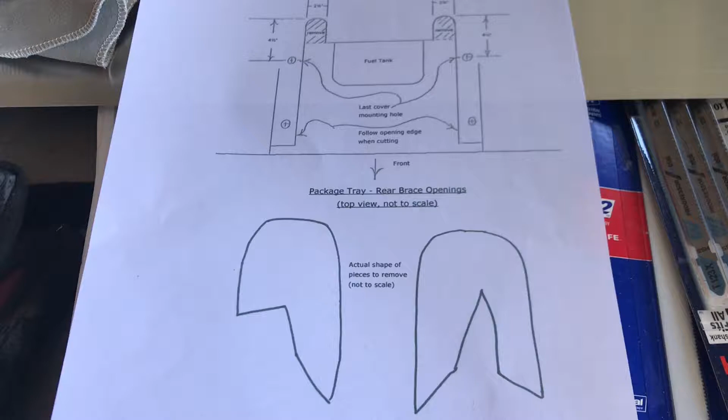All right, we're on to the next stage here. It's time to cut the package shelf in order to get this roll bar to fit in properly.

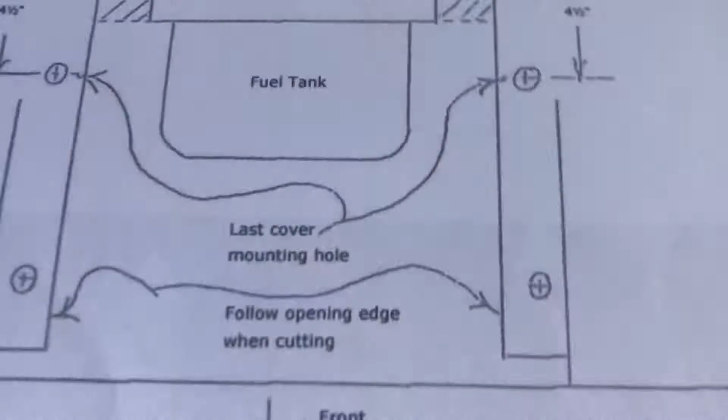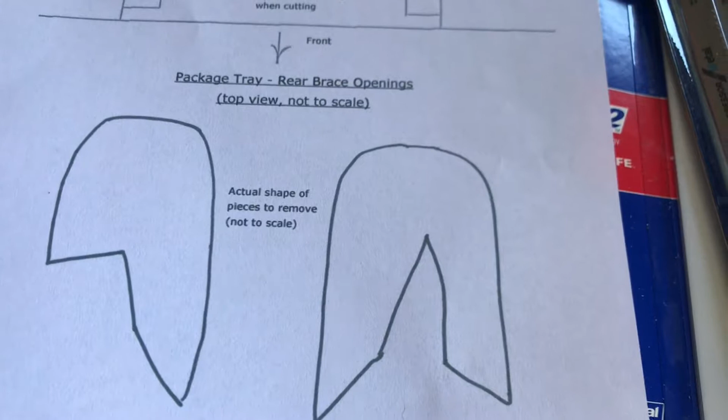They show you dimensions that you're supposed to cut at from the last mounting hole: 4.5 inches back, and then straight along that edge, 2¼ inches in on both sides. And then they give you these wonderful drawings: package tray, rear brace openings, top view not to scale, actual shape of pieces to remove, not to scale.

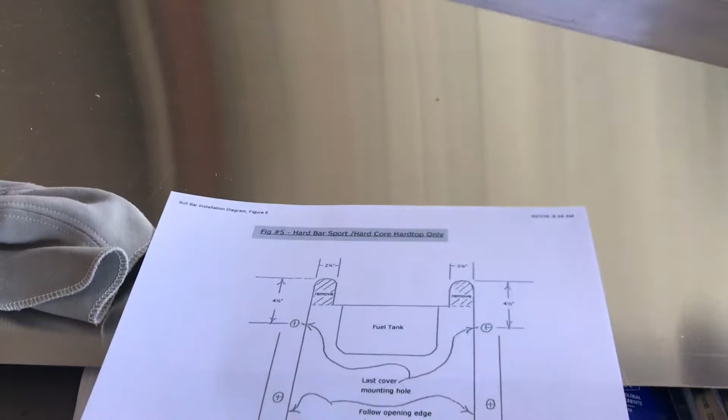One of the things I'm doing is using a battery powered jigsaw to make my two initial cuts. I'll take you into the car so you can see what I'm doing there. Then I made two 2¼ inch pieces of aluminum stock, and I'm going to use that to get the rest of the stuff done with a clean break, hopefully, as long as I am able to do what I plan on doing.

So let's go inside the car. We'll look at that, and I'll grab my two little pieces of aluminum here that I'm using.

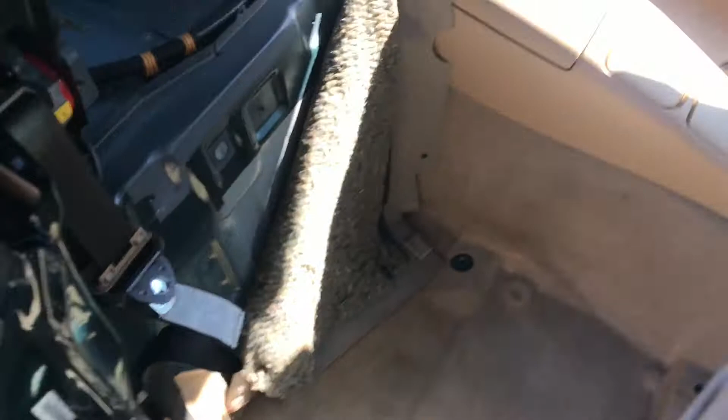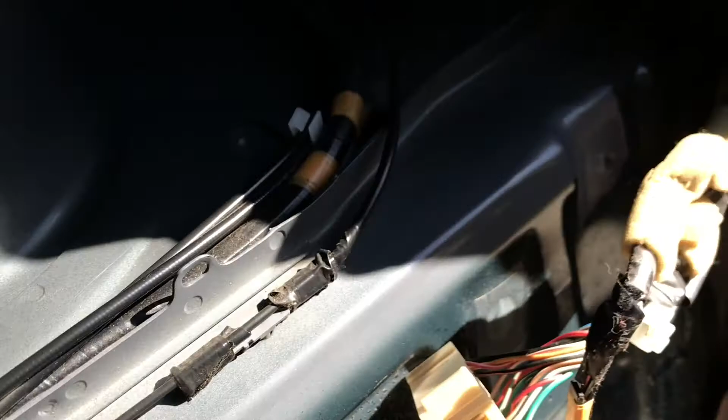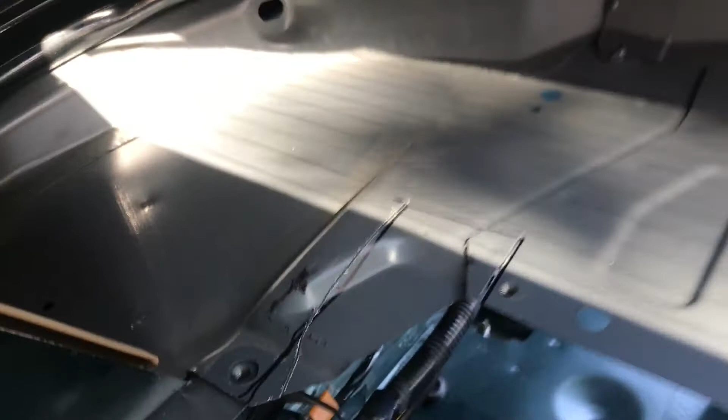Now, one of the other things I did was, as you can see, vacuum cleaner right there. Using that jigsaw, you're going to get little pieces of metal everywhere, and I mean they were everywhere. But I've already taken the vacuum in here and vacuumed up everything that I could find and see, so all of that is out of here. And also, don't forget, wear your safety goggles or glasses so you don't get crap in your eyes, which will be a pretty bad day, getting metal slivers in your eyes.

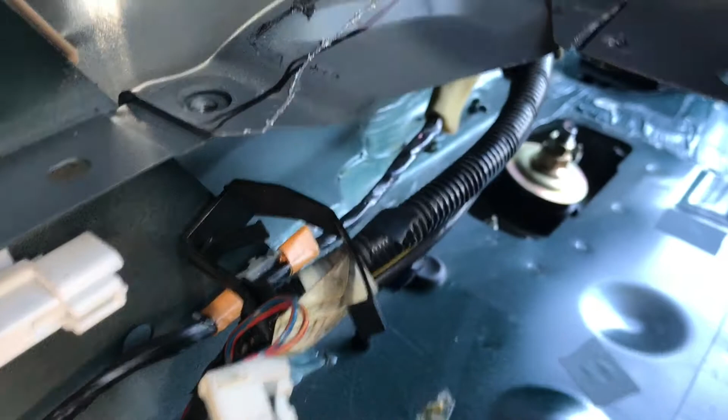So anyway, here's my first two initial cuts. Now, using that jigsaw, because of this tower right here, I wasn't able to get in right where my line started at. That shouldn't really play a factor too much, but I plan on cleaning it up, making it a nice straight line, and then coming down, as you can see, my line comes down to here.

Here's where the 4.5 inches was. Then I came across. Now, I'd rather be off shorter than longer, because I can always remove little bits and pieces after the fact. So I've got these two pieces here.

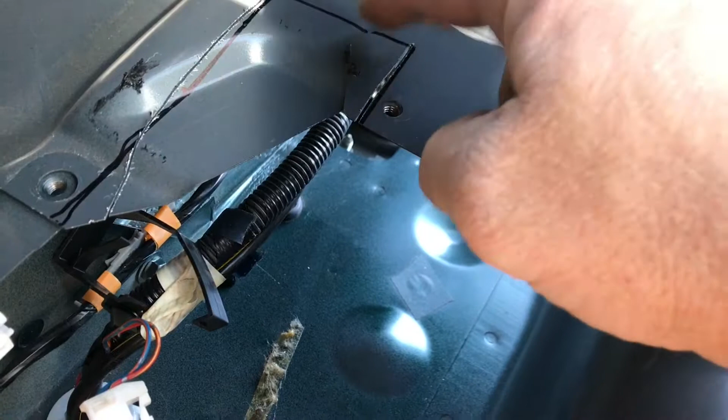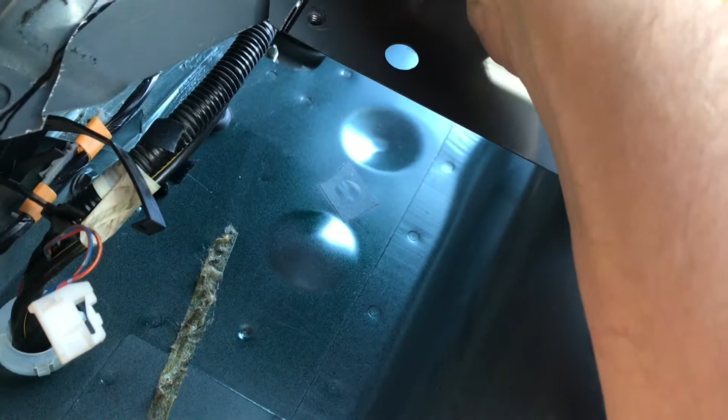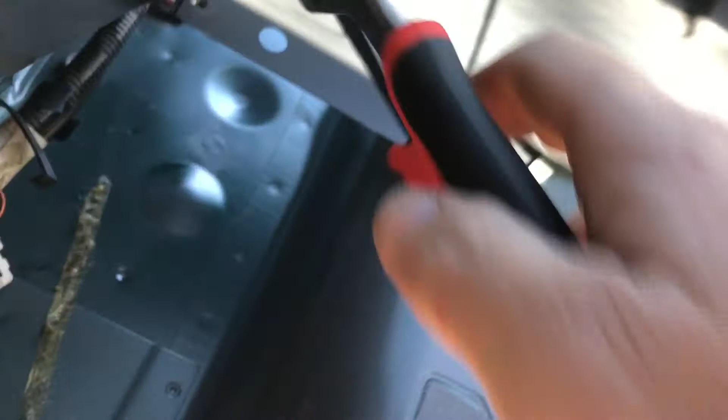What I'm planning on doing now is I'm going to take some tin snips. I'm going to cut along here first just to get rid of this piece, and then I'm going to take these pieces here, put them on both sides of my bend, use my channel locks to grip it all, and then start manipulating it back and forth until it snaps off. It should give me a nice clean line to work from there.

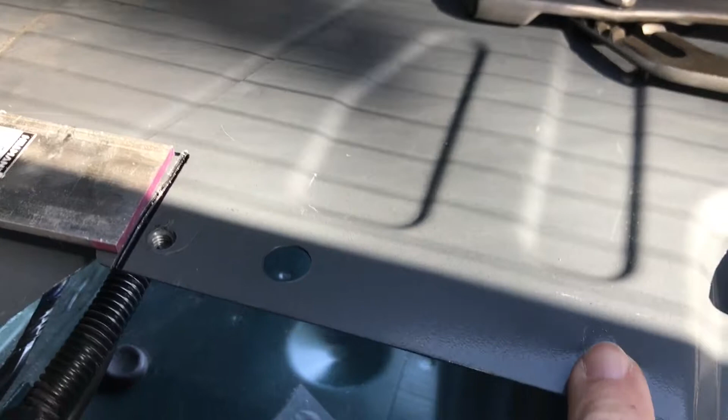Now, I did keep my two mounting holes here so far. If this is a problem, like I said, I'll just trim off as much as I need to get it done. I don't feel like taking off my top, just because I'm the only one doing this alone, and I don't have a second set of hands to help me get this top back on. The top is in really great condition, I don't want to mess with it, and it's also got the glass window, so if there's one less thing I have to do, then great. So anyway, I'm going to get to removing those. I've already made my two straight cuts on that side as well, and we'll keep going from there.

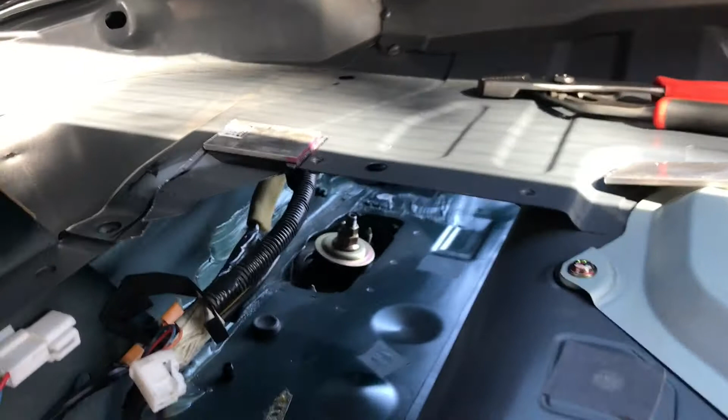All right, so round 2 of cleaning up all the metal flakes and everything else is done. As you can see here, I got my notches cut out per the measurements. A bunch of metal pieces over there laying on the floor, or ground, I guess. Floor. I am awesome with words today.

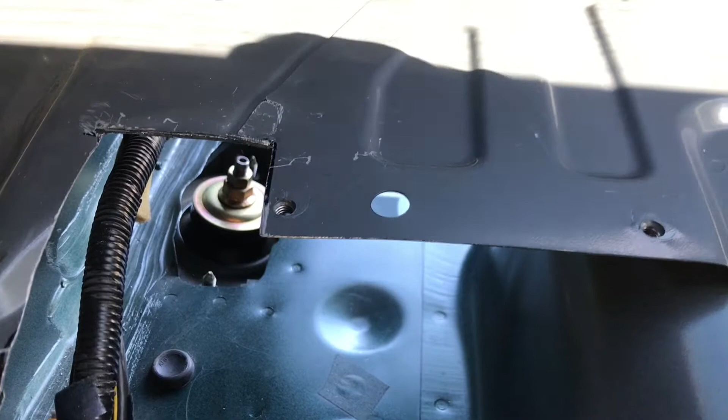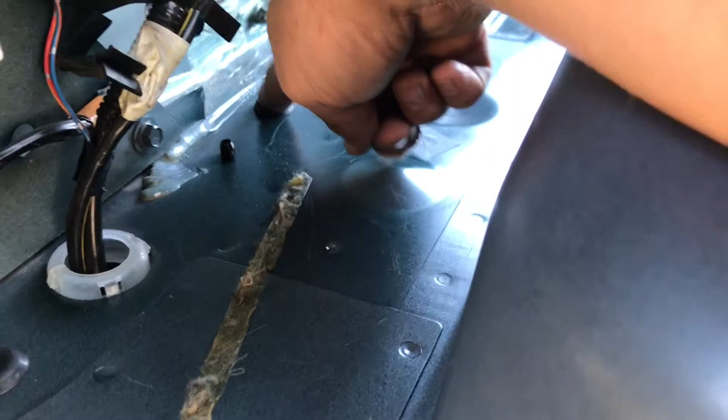I don't have ABS on this car, so I don't have to worry about that step on the install. This plug here is the plug they're talking about when you have to deal with the ABS, but for my instance, I'm pretty sure it's just a rubber plug. So I am pretty much, I think, done in here. I am going to put the, or actually, no, I'm not.

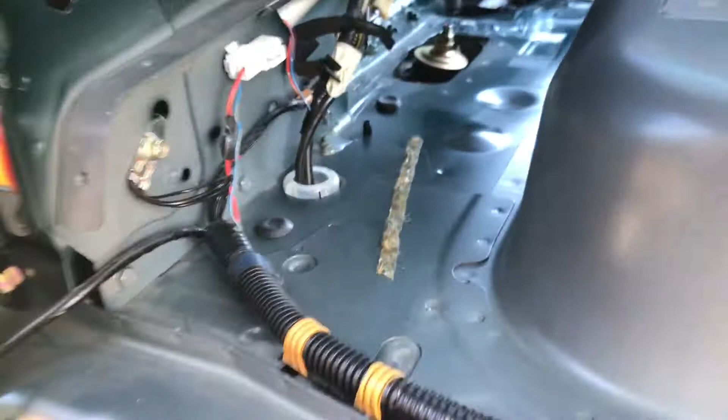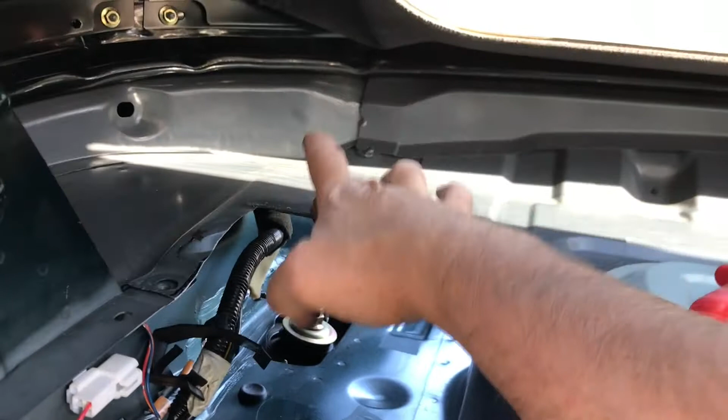I gotta undo the seatbelt brackets here, pull those out, and then I will do a test install to see if my notches are deep enough for the roll bar where it needs to go. I've filed all these edges down to get them so they're not sharp, no sharp points, rounded out the edges here.

I also have some stuff that I can put around these edges if I have enough room. But I also want to make sure I don't go overboard with it, because I also have to put that package shelf back on, which I also need to notch out as well.

So anyway, that's where we're currently at. That side's done as well. I got all my implements of destruction sitting there on top of the gas tank cover. But all right, we're gonna do a test fit real quick.

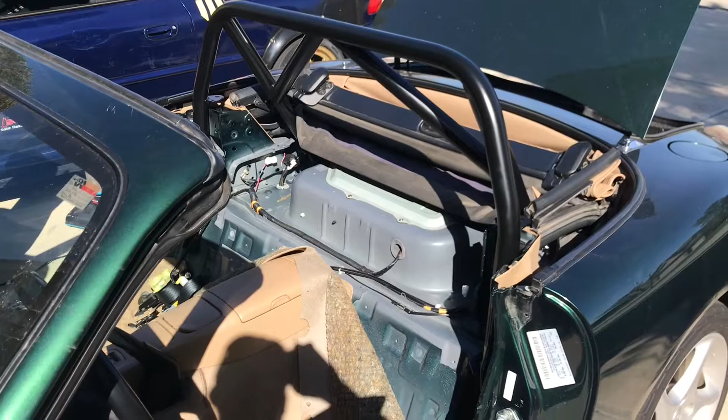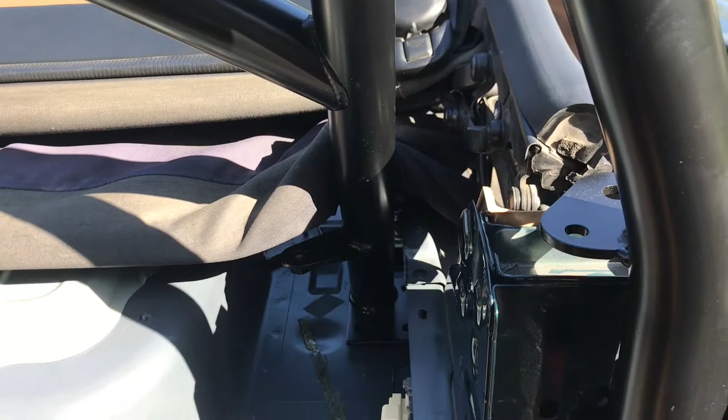All right, so the test fit has gone pretty good. I notched out the package back there, the package tray is what they call it. So got that over there, got that over there.

I will be marking my holes over here. I'm going to put in the bolts into the tower first before I mark the holes, so this way I know it's up flush where it needs to be.

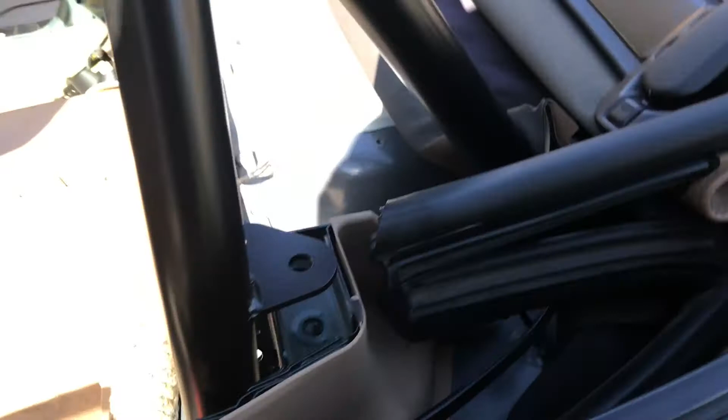Kind of give you some other items here. So there's for the seat belt attachment point, will be there. This will mount down through here with supplied hardware. The soft top bends up on top of there.

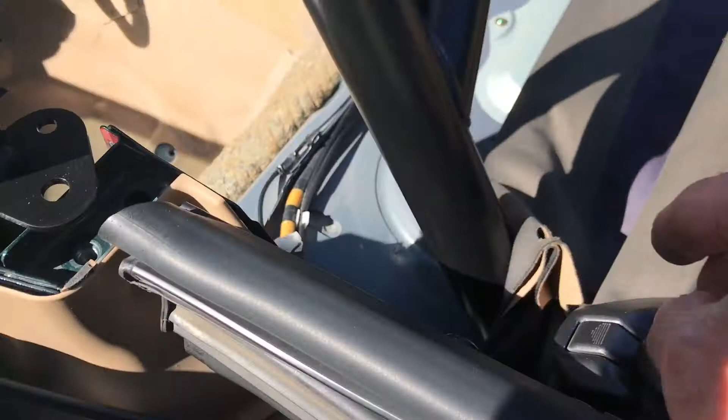I do have a glass windowed soft top. So there is a little clip over there that has to be removed, and then that wire will come over on this side of it, which is perfectly fine.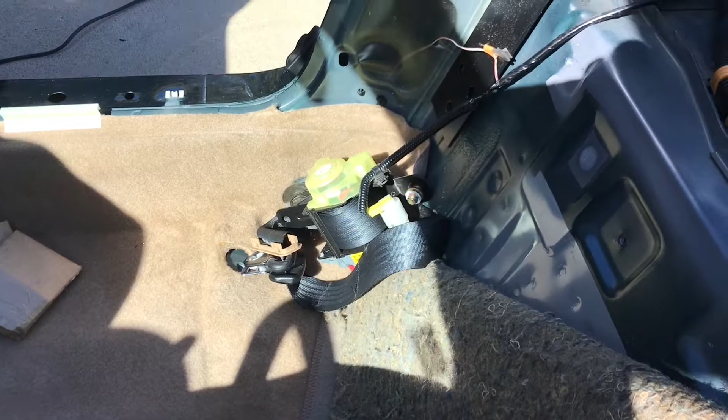You take out the seatbelt bolt towers right there for right now. Once again, like I said, I'm just doing a test fit with all that stuff removed. So I'm going to put those back in here in just a minute. I just wanted everything out of the way.

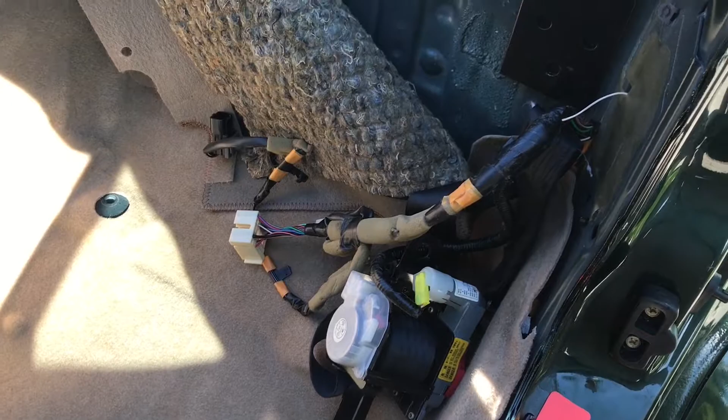That also helped me get the— what am I trying to think of— the wire harness loom down out of the way as well.

Looking back here so you can get another look from the back here. That's where that mounting plate is going to bolt in. That's where that one bolts in. I have those rubber stoppers in there still, so I'll have to remove those. But all in all, it looks like everything is cleared out of the way.

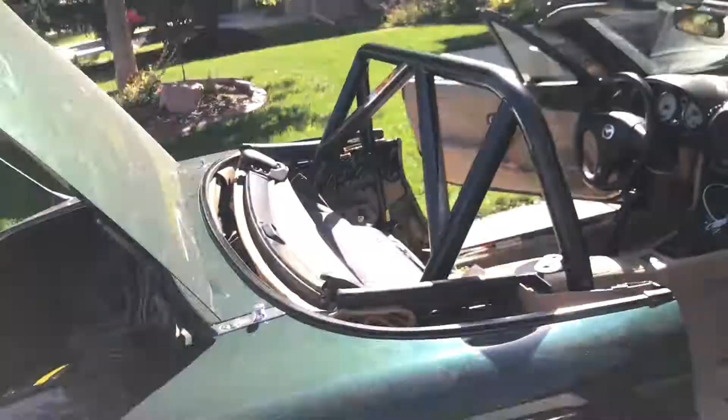So now it comes time to jack the car up, take off the tires, remove everything in there, mark my holes, and get to drilling. All right, so that's where I'm at right now.

And once again, this is the Hard Dog M2 Hardcore Hardtop double diagonal bar. It's good for the hardtop and all soft tops, whether you have the plastic window or glass windows, and it even states the aftermarket ones, which I wouldn't know because this one is stock glass. So that's where we are right now.

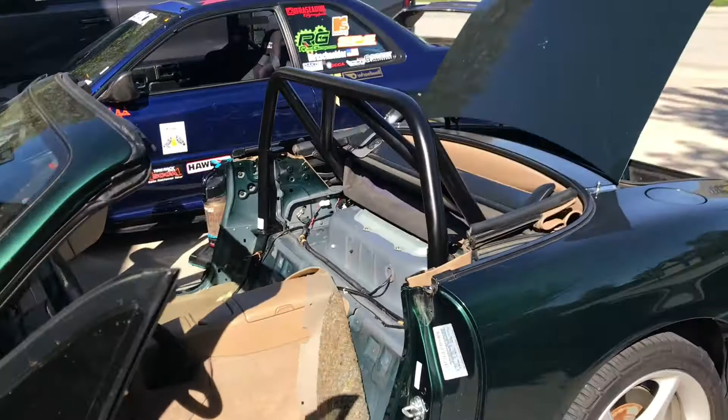All right, on to doing some more stuff.

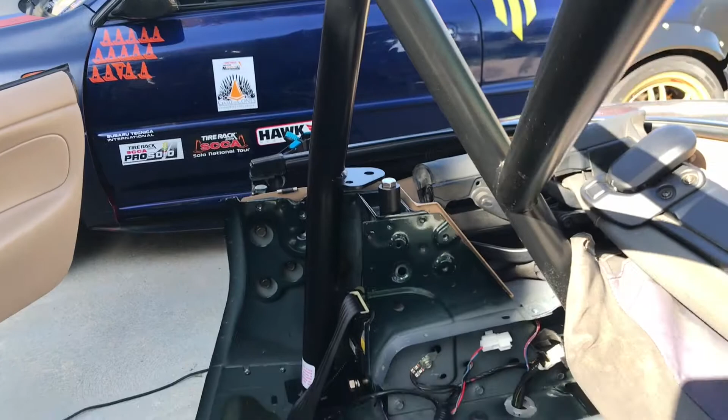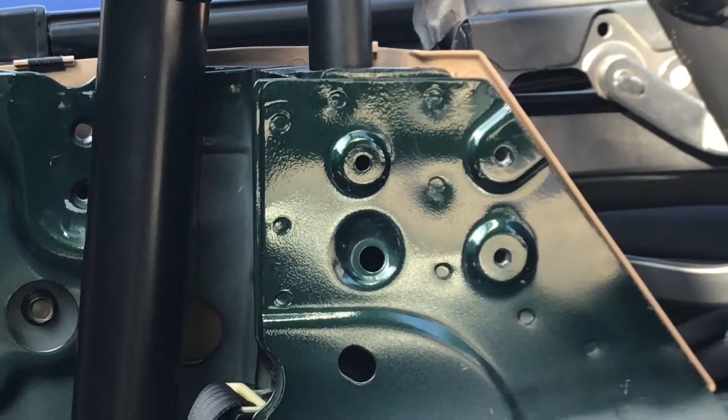All right, so here's the issue I'm currently having. That one there seems to be the right height, and if you can see what I'm talking about here, I'll zoom in. It goes in, I can get the bolt through it, and that's all good and fine.

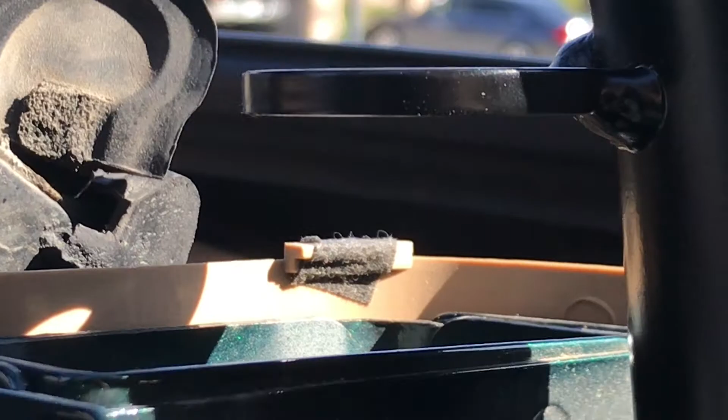However, when you come over to this side, on the driver's side, and I know it's custom parts and everything else, you put this one in, and for the life of me, if I can get my camera to get on it—there you go.

Yeah, that's gonna take me either grinding this one down that they give me, or something, because if I get it on there, then I can't tighten this bolt down here and it's not sitting flush. So I guess I'm just gonna make a mark and I'm gonna have to grind this down to make it fit. So yeah, right there.

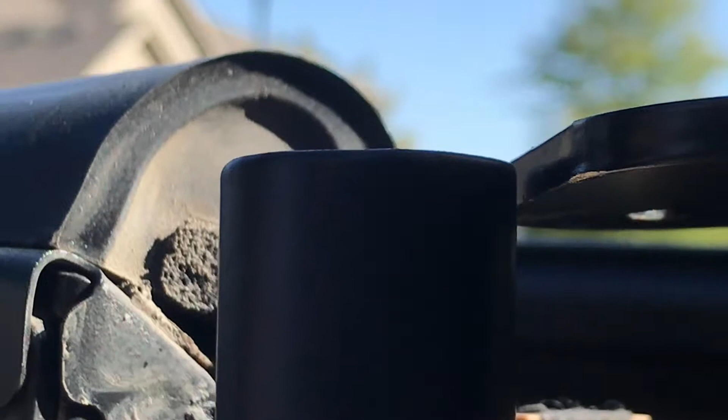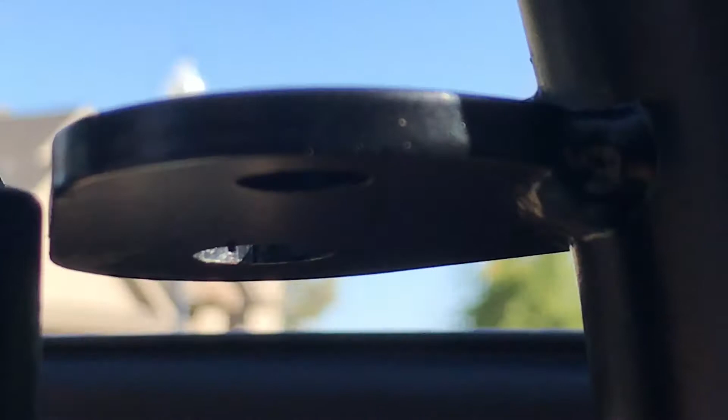Anyway, it's not like this is longer—I've already swapped them over. These are the exact same length as one another. I think this tab was welded down just a hair lower than where it needed to be. It needed to be up like maybe 1/8 of an inch. And then I also noticed this wasn't a complete weld around on this bracket.

But as you can see right there, they welded the entire underneath. They got up here, almost to the end, and then they said, oh, coffee break or something. So anyway, that's where I'm at.

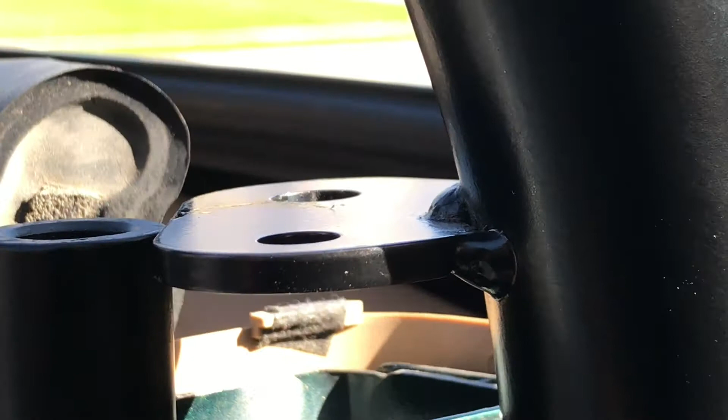I'm gonna just grind that down. I think it's about the only way I can really go about doing this to get this to work today, and I don't have time to try to reinstall, so yeah.

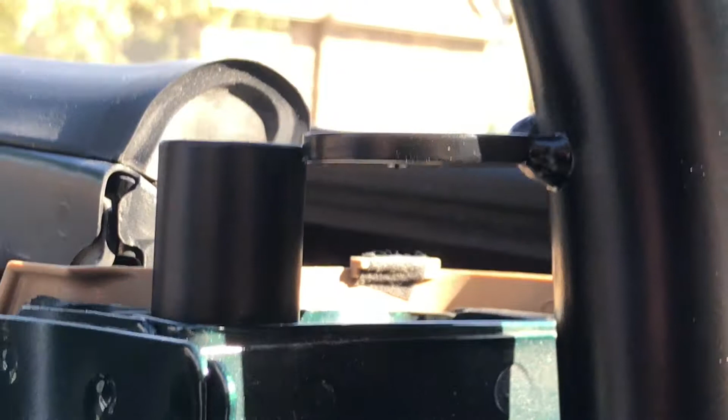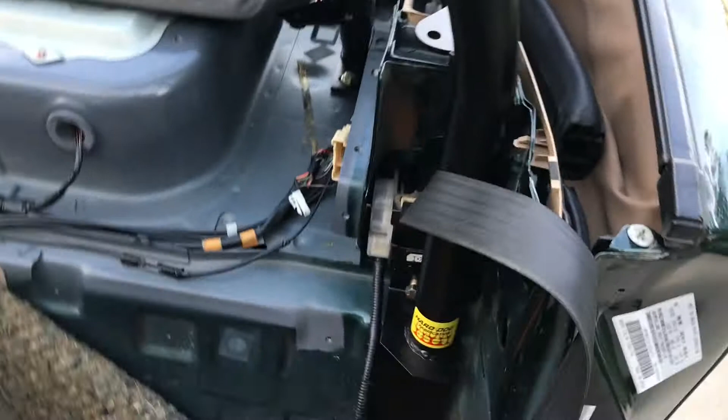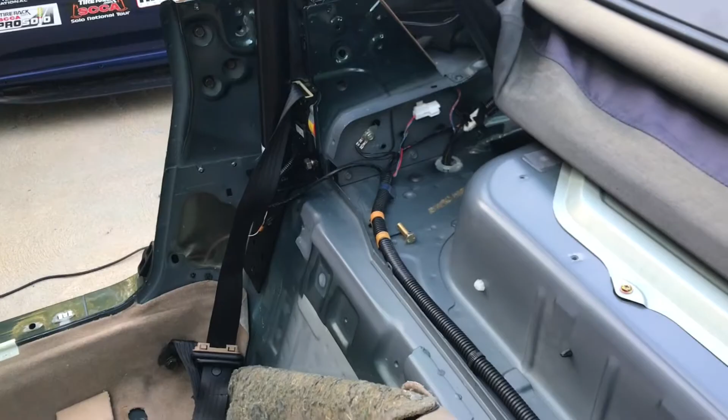All right, give you another update where I'm at now. It's about 4:30 p.m., so I've been doing this for about 7 hours now, and there's a couple of little issues that are fun to work on to get by, especially tightening these bolts down here. You can see that one over there—those are a pain in the ass. It's hard to get anything on them to actually turn them.

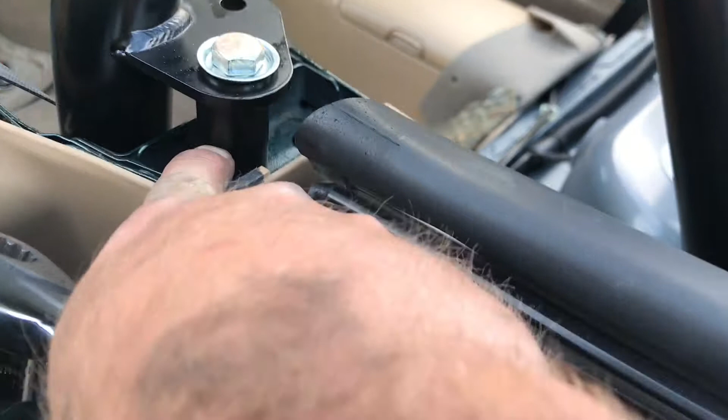I might eventually, maybe not. Anyway, right now what I'm doing is I'm bolting in the back of the bar per the instructions. I did notice one of the things it said was that these spacers I was complaining about just a little while ago, because of differences in the chassis and flexing or whatever might happen, might not fit very well.

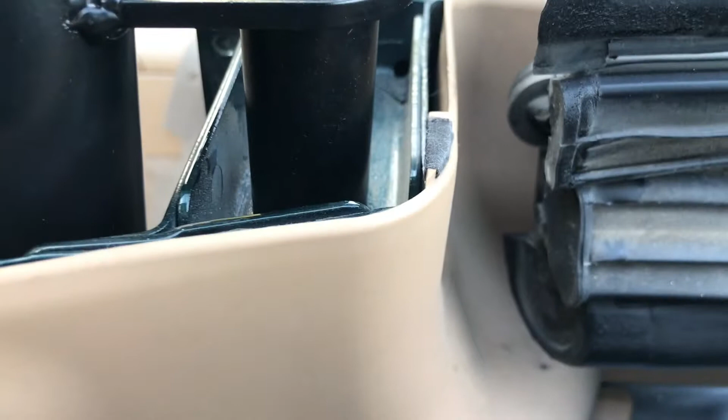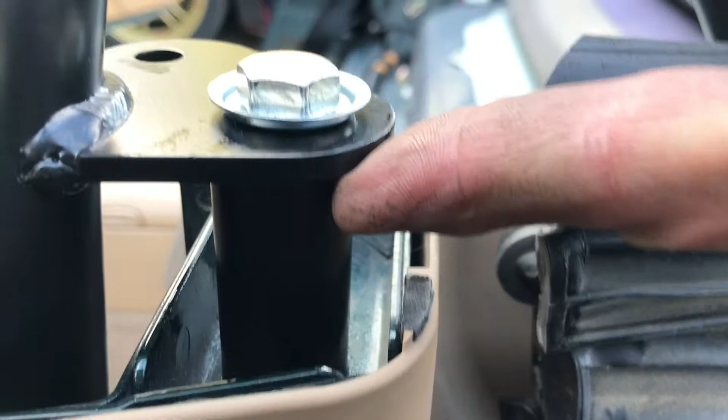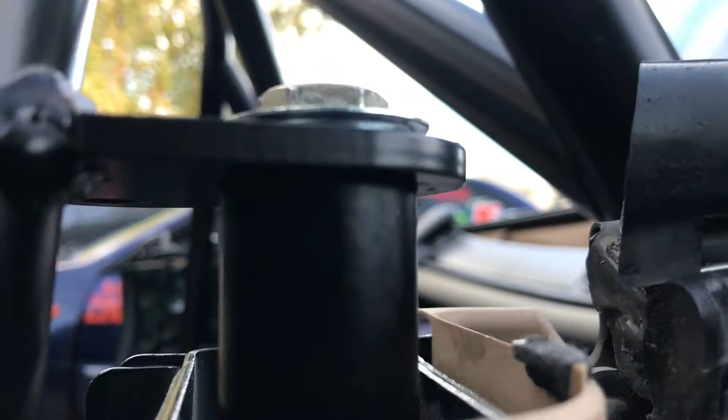It gives some things you should possibly try to do—if there's a gap, obviously you don't want to run it loose, so you'd want to put a washer in there or fill it with washers or spacers to even it up. In my case, this one was shorter, so the spacer was too long, and I had to take just over 1/8 of an inch off it. Good thing is I have a grinding wheel, so I just ground it down and beveled it to match the angle, so it sits in there flush now, and that one over there is flush too.

So we're all good to go on that point, and we're just going to continue on. I pulled out the seats in here—as you can see, it's dirty, so I sprayed it down a little bit and was drying it off. Mainly all I was really trying to do was get all of the massive amounts of caught up dirt, like the big clumps, out of there.

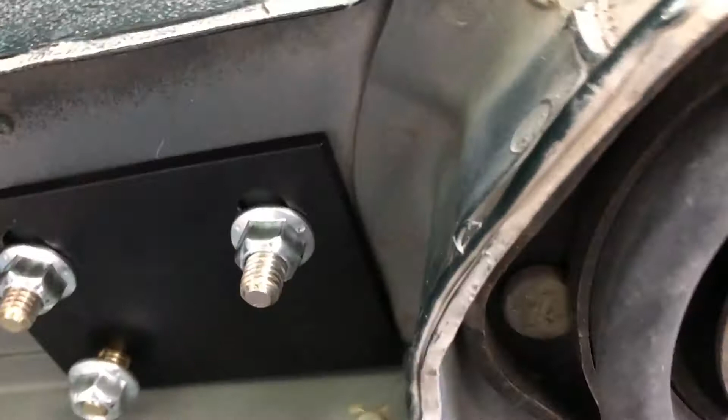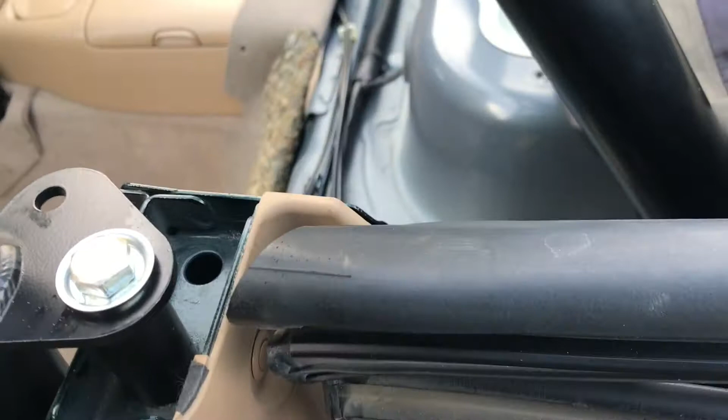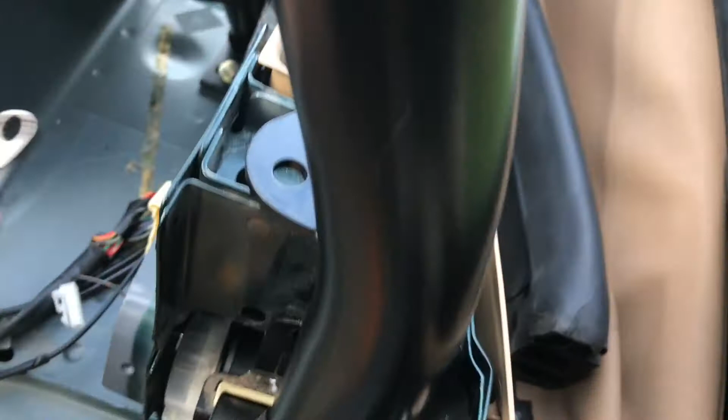Once I get all these done, I'm going to probably spray them down a little bit. As you can see, there's the backing plate right there, and a second person helping out here would make it a heck of a lot easier. However, all I'm doing is putting the ratchet with the socket down here, holding the wrench up through the bar right through this angle, and then just reaching down and holding onto my wrench on the nuts down there. Haha, said holding my nuts, but anyway, that's the next one I'm going to be tightening right there.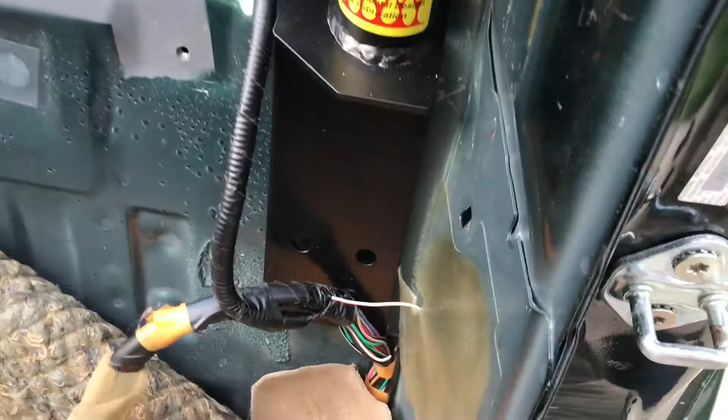And then we'll go over, we'll drill that side out and we will tighten it down. Once that's done, we'll come down to these areas, and then I will hook up the rest of my seat bracket up here. So that's where we're at right now.

Great news is it's nice out today. I mean, it's actually beautiful, other than a little breezy, but that's okay. Anyway,

Here's the lower bracket mounting area for the Hard Dog bar. As you can see, it has an angled plate that goes up against the unibody, and then the backing plate gets bolted in. As you tighten them down, it ends up pulling it all in to hold it pretty tight up against the back wall here. So then you've got that one up there, that connection point.

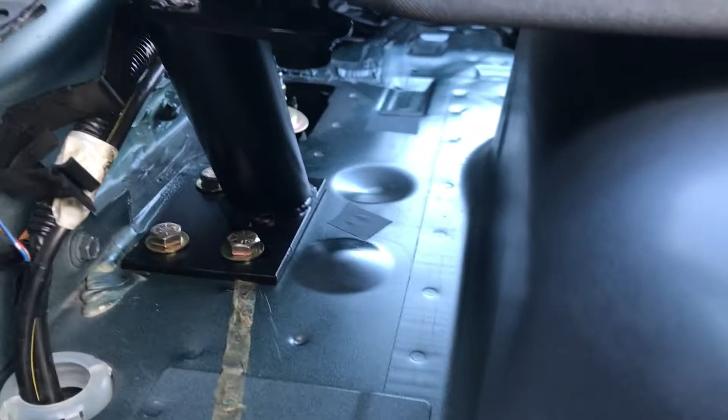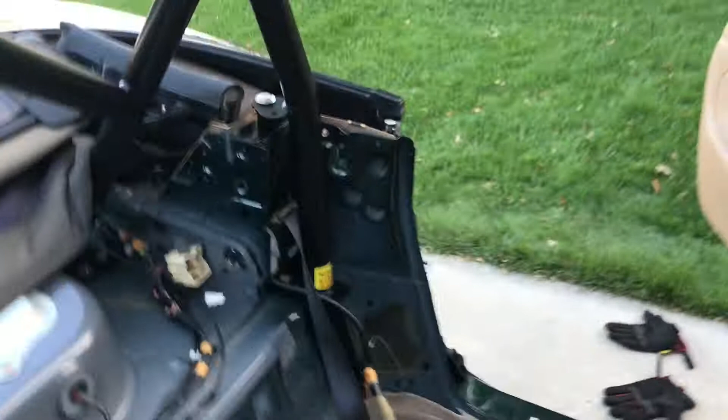Then you have 3 more back there with the backing plate underneath, which is right there. So that's pretty much it for the install. Once I get the other side done over there—that's the only one I have left to do—then it'll be time to put everything back in the car.

So I've already tested the soft top. It goes up and down without anything being messed with. It does have this here—the glass is right here. There's a...